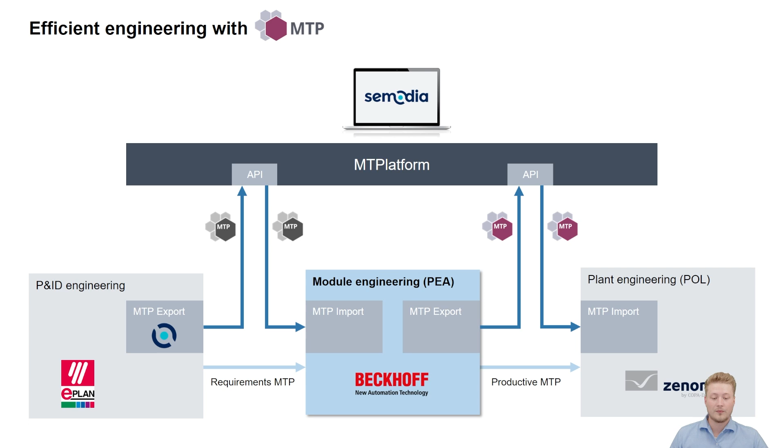Afterwards, we generate the PLC template as well as the local HMI completely automatically. From that, we program the module real quick and activate it to have an online module available to export the MTP file as a productive MTP now again to the MTPlatform. Let's switch into the engineering environment.

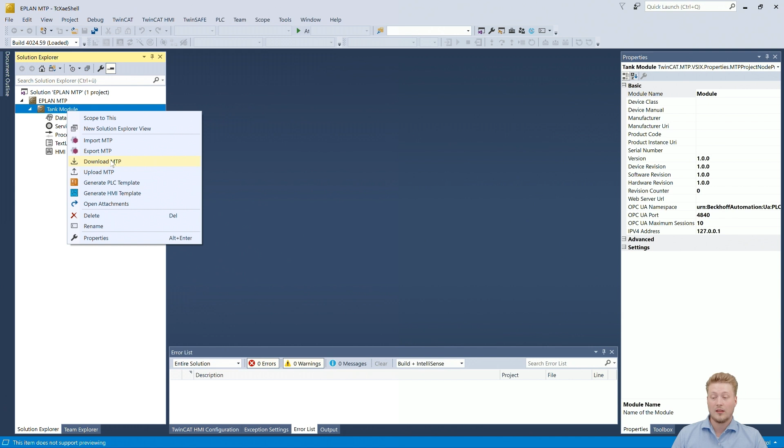We see that I already prepared a small project, an MTP tank module project, which is empty for now. So no data objects or any HMI structures created. What we will do now is we right click here and select download MTP, which is available as we set the Semodia MTPlatform API key.

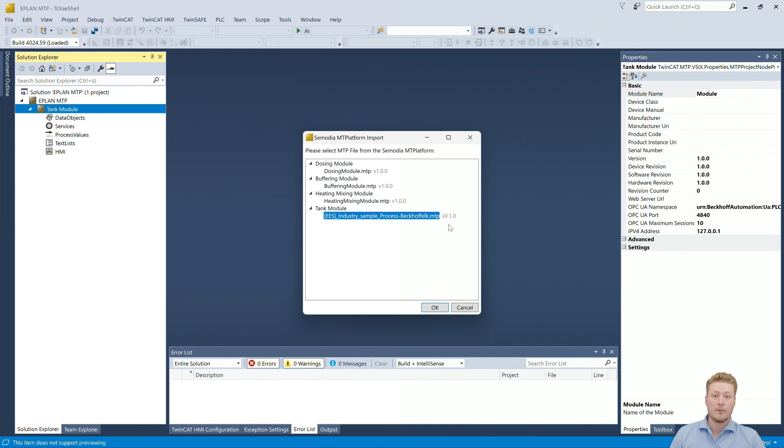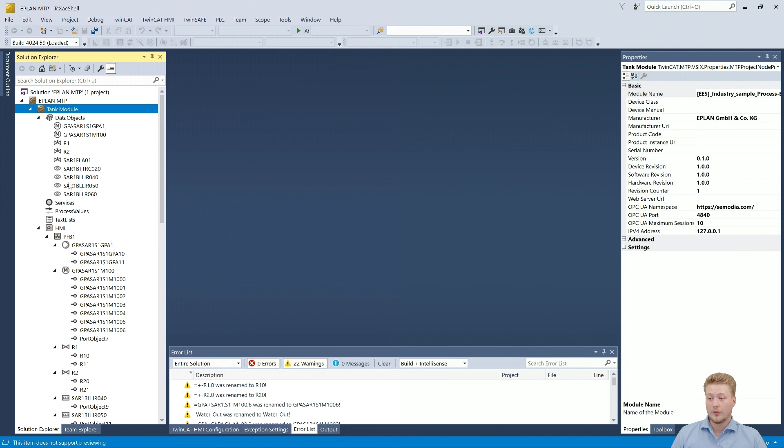We can see here now the same projects and MTP files that we have seen on the MTPlatform, and see also our requirement MTP from ePlan under the tank module in version 0.1. So let's select that and say that we want to override our current settings. Now we can see that our MTP project was populated in here. So we see a lot of different data objects already, as well as their graphical representation inside of a picture.

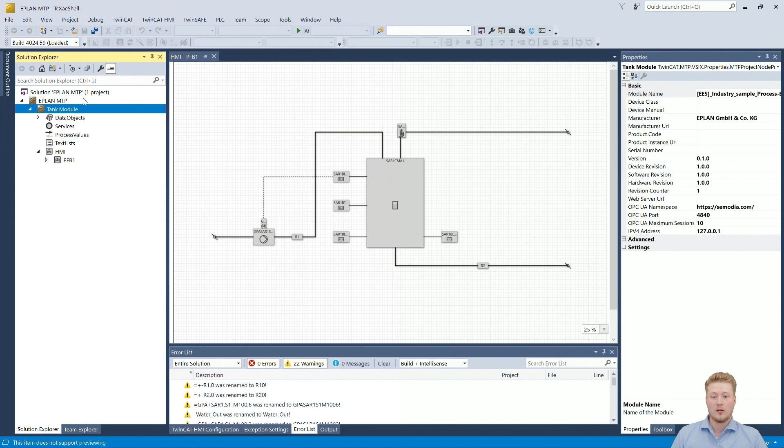We will now enrich this tank module with further information and services that can later on execute dedicated functionalities from the module. As we have limited time, we will do a quick skip here. Now, with the finished MTP project definition, we can see that on top of the data objects, we also see now a service empty with a procedure complete empty, as well as a service fill, which can either completely fill the tank or fill it to a certain level with a dedicated level procedure parameter.

Additionally to the services, we also created a process value out for the level just to see how that is possible, and how you can also see it later on in the Semodia platform or the POL. Then we just compressed the module structure a little bit to better fit this onto the HMI screen. Now, as the definition of the module is finished, we are able to first of all generate our PLC template out of it.

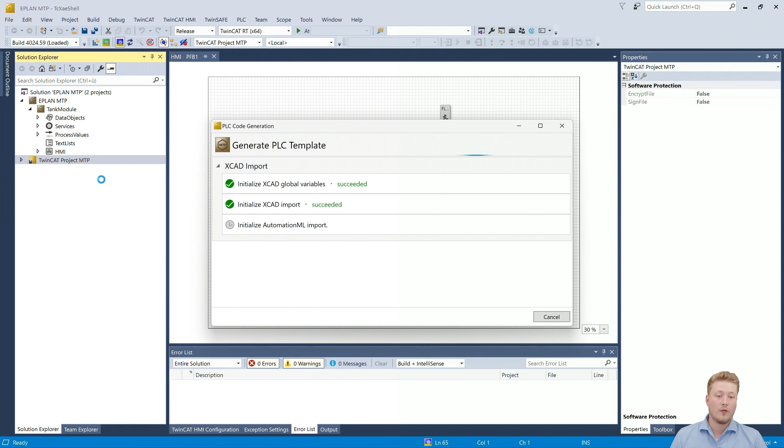By clicking the generate button, it will basically generate the whole basic structures, instantiate all of the data objects, data assemblies, as well as the services. With a quick activation of that object, these symbols will already be available online for us to later on generate the HMI. Hit close, and now we can see on the left side here that this TwinCAT project was created, and inside the TwinCAT project a PLC project for our tank module.

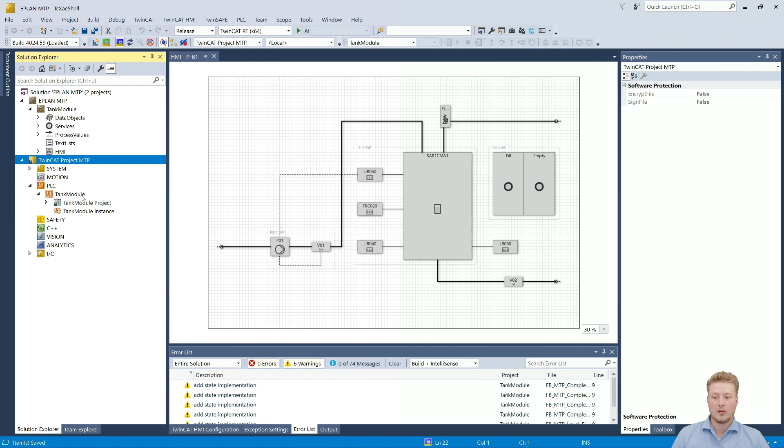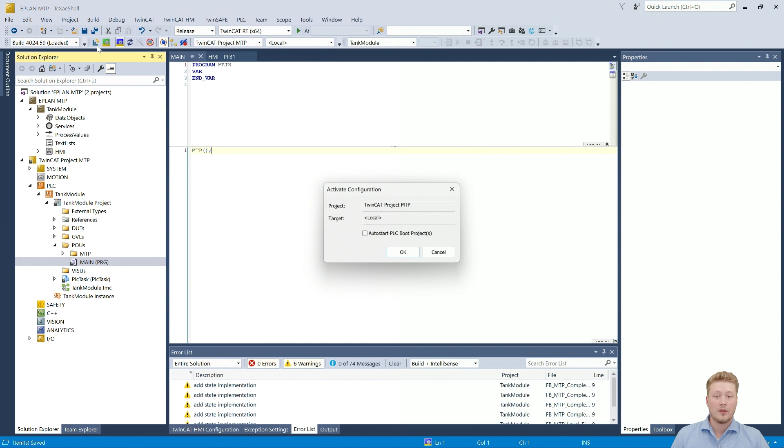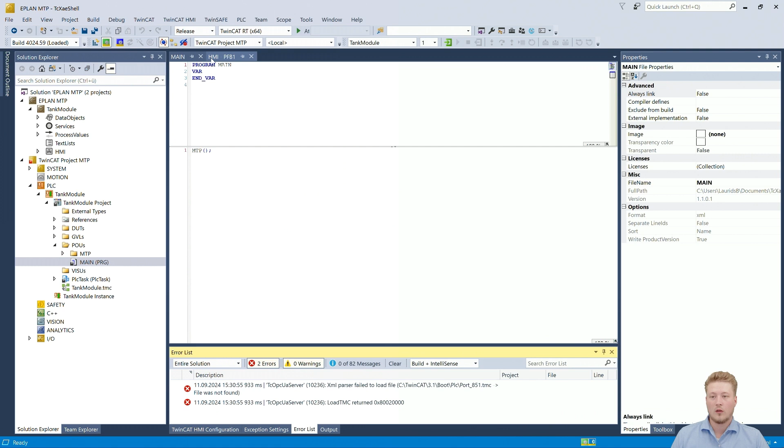We quickly go into the main and call the MTP program. With that, we are able now to activate the module to afterwards generate the HMI. Quickly log in and press play. Now we can log out again, go back into our module, tank module, and again hit right click to generate the HMI template.

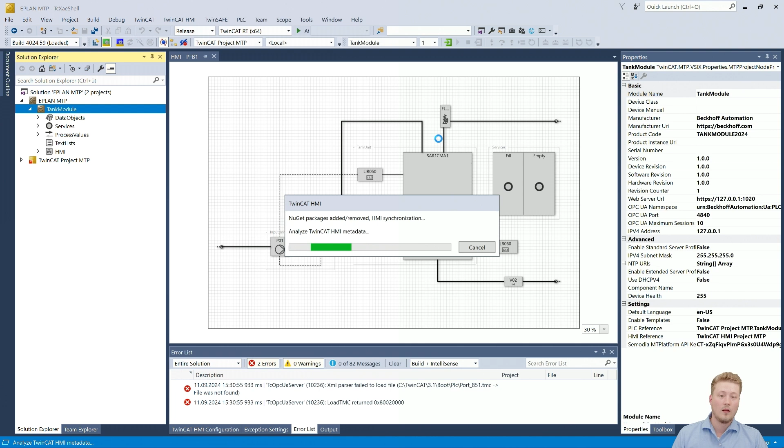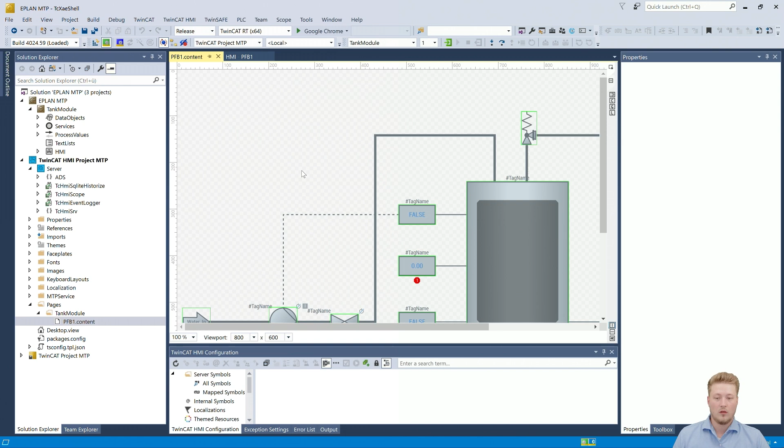This will now in the background basically translate all of these objects here from our HMI structure and replace them with the fitting HMI controls from our HMI library. This includes also dynamic faceplates that automatically adapt to the specific data type, for example, a binary valve or an analog pump. All done, and we can see here on the left side now that we have an HMI project. Let's go, for example, into the content to see what was created. This is now a dedicated HMI page for our module, and we can directly see how it was translated into our system.

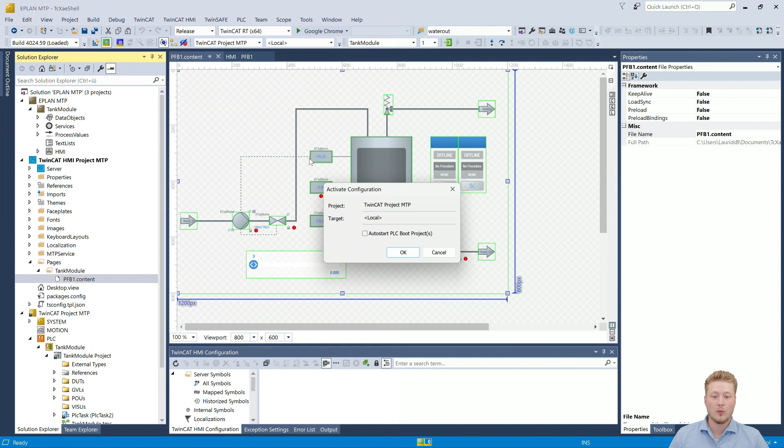Now again, due to time constraints, we will quickly adapt this and enrich it with a linear gauge, for example, to be able to adapt the fill level, and as well program the service states in the PLC template. As you can see, we now have the linear gauge available here. In the next step, we will activate the module again to also make sure that our service functionalities are now available. So we activate and log in again, and make sure that the PLC is running.

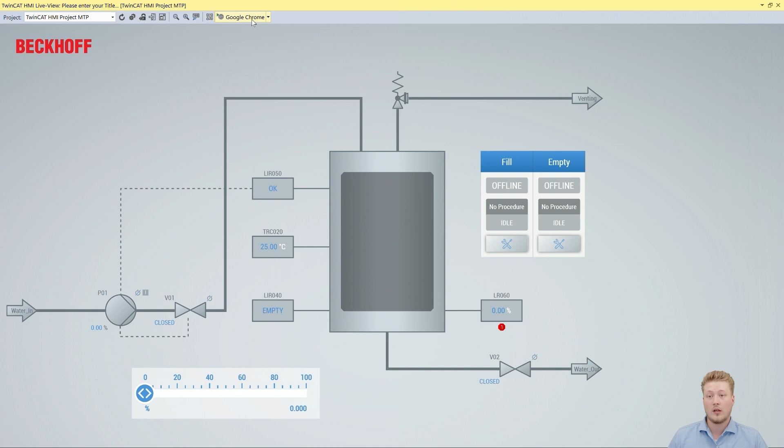Now we can have a look at the live view of our HMI, for example, right-click on the desktop view and say Show in Live View. Here we can either use the inbuilt embedded browser, or we can also open it in Google Chrome, for example. Here we now have our module available in the local HMI and are ready to test it. For example, via the linear gauge, I'm able to manipulate the fill level.

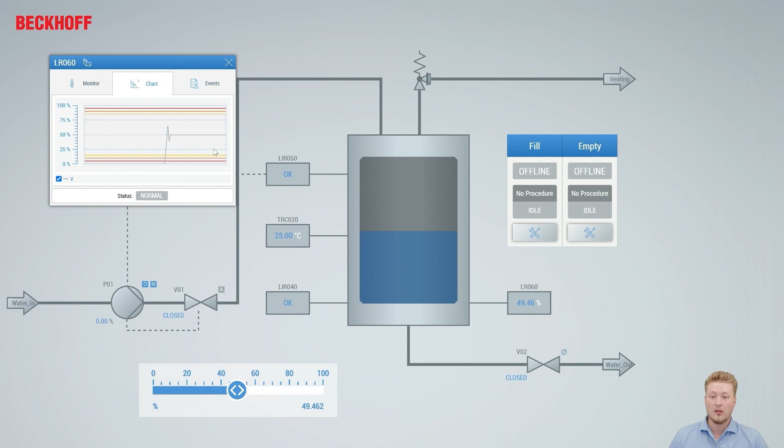But I can now also, for example, manually start a pump by setting it to operator manual and giving it a set point. By then hitting forward, it will start the pump and at the same time also open the valve, as we have programmed the dependency. Another thing that we can do now is, for example, open the chart tab for our fill level of the tank so that we can see if it's inside our limit monitoring boundaries.

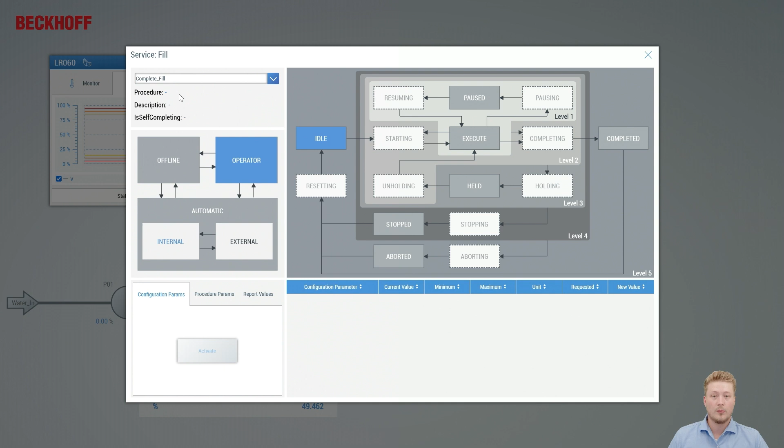Now we can, for example, go into the fill service, set it to operator, and select the complete fill procedure. Now by hitting start, it will go into the execute state, and we can see that the pump was now automatically started. By increasing the fill level up until the tolerance point, now the service automatically completed itself and therefore also stopped the pump. This functionality will later on be triggered by the POL.

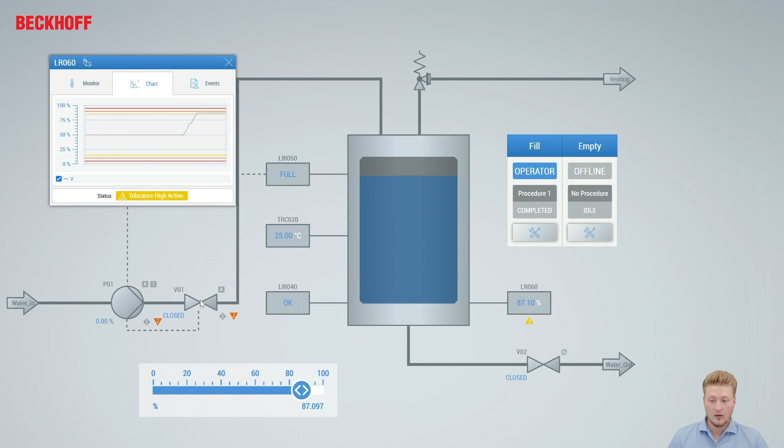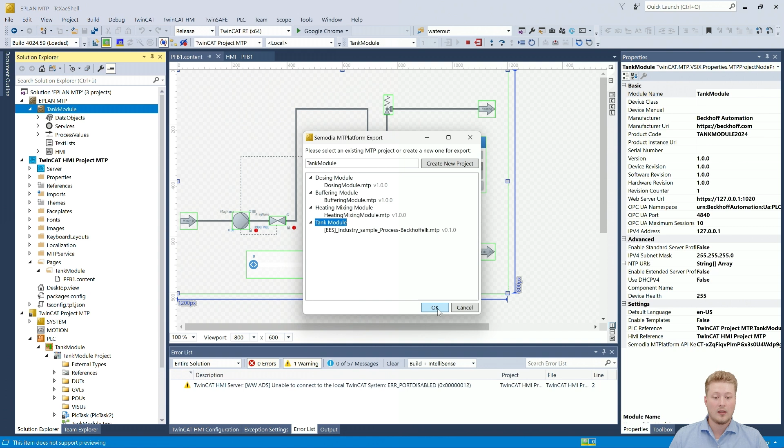To now test our implementation, first, we are still missing the step that we upload our finished productive MTP again onto the Semodia platform. For that, we go back into our project, go to the tank module, and instead we now hit upload MTP. Again, we will see now in a second the summary of our different projects that are available inside of the MTPlatform. We do not need to create a new project as we already have the tank module, so we just choose this and click OK. The MTP file was now successfully uploaded to the MTPlatform and is ready for testing via that.